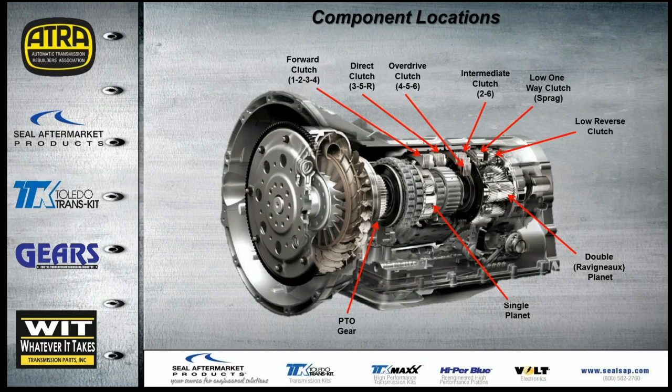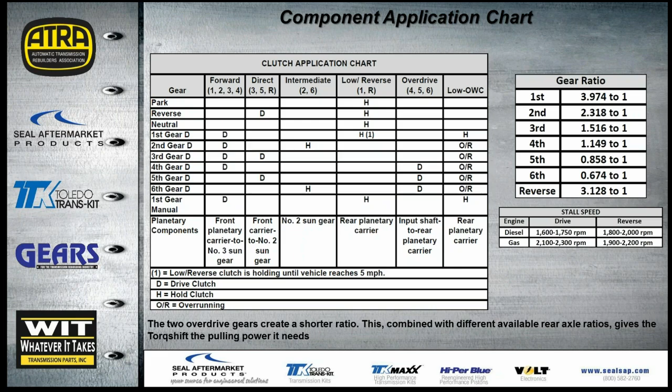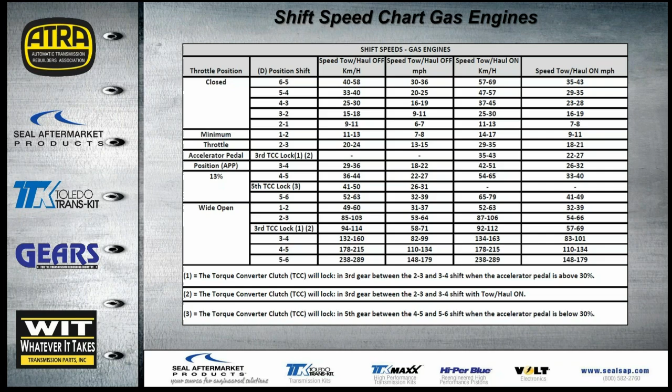And then you can see number 3 at the bottom, lockup will come on in 5th gear, also between 4th and 5th and 5th and 6th. Again, the accelerator pedal has to be below 30%. So this is considered normal operation.

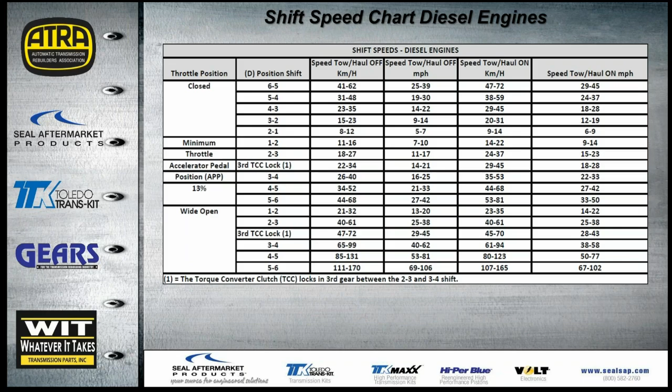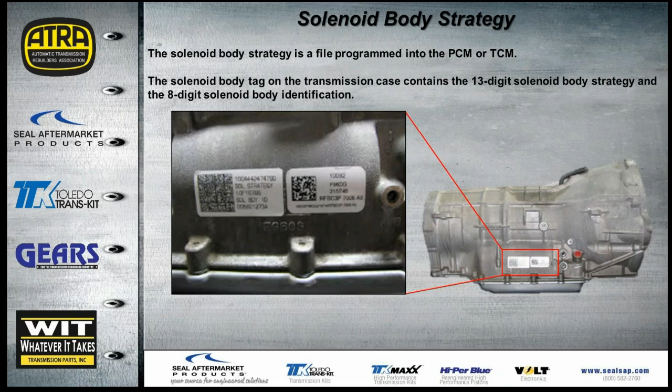Anytime a new valve body is installed or a new solenoid body strategy file is downloaded into the PCM or TCM, you're going to need a capable scan tool. A replacement solenoid body tag is supplied when you buy the new solenoid body. This contains the 13-digit solenoid body strategy and the 8-digit solenoid body identification. As you can see here, the new tag would be placed over the original one with the solenoid body tag.

You just place that over that one there. Again, if we're not changing anything, we do want to take a picture of this tag also and keep that on file.

Now, if the solenoid body strategy printed on the tag or the solenoid does not match the solenoid body tag on the side of the case, a new valve body must be installed and the solenoid body strategy must be downloaded into the PCM or TCM.

You could have problems of harsh shifts, erratic shifts, harsh engagements. This could be due to the fact that the solenoid body strategy is not programmed into that PCM. This happens quite a bit when guys swap out valve bodies with used ones or reman ones and don't update the software for it. This is going to be something that's coming over the tech line quite often.

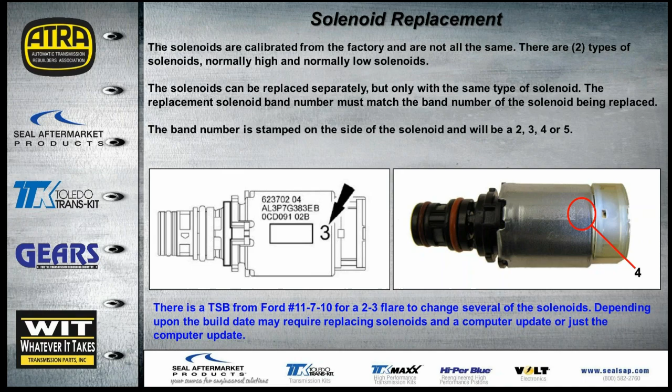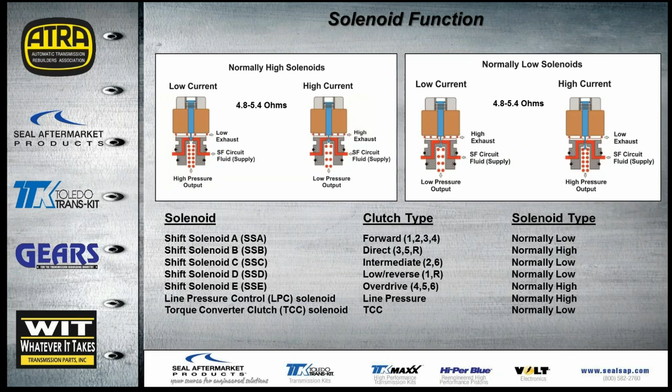Now, we recommend marking the casting on the valve body and marking the solenoids so that when they are removed, they will be placed back into the same location that they came from. And now we're identifying all the solenoids here for you as far as which ones are for each clutch, also whether they're normally opened or normally closed.

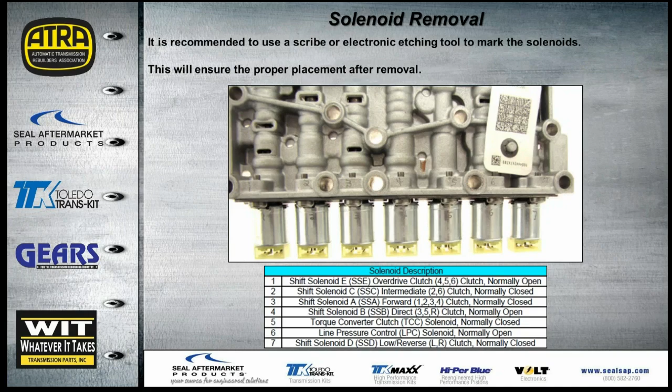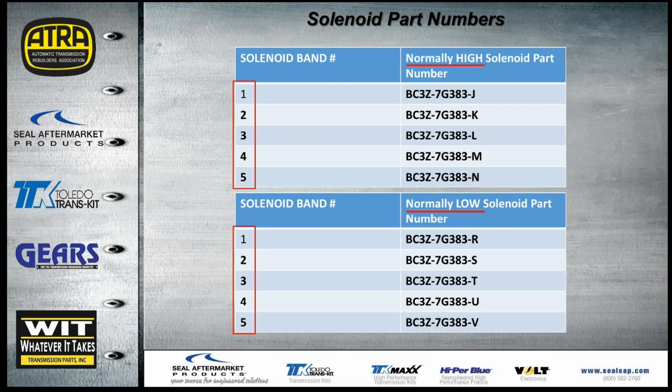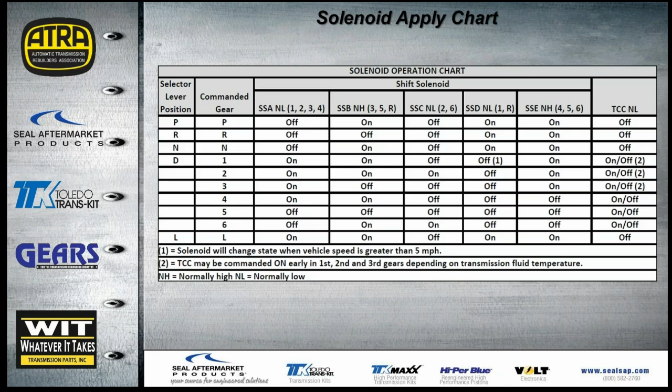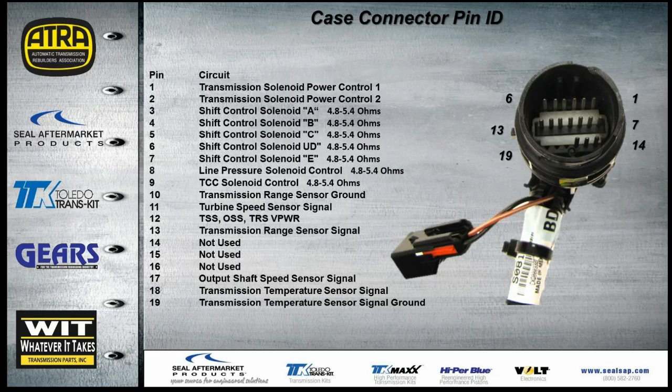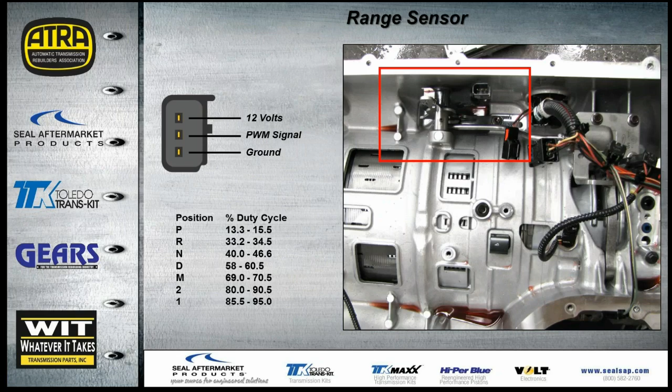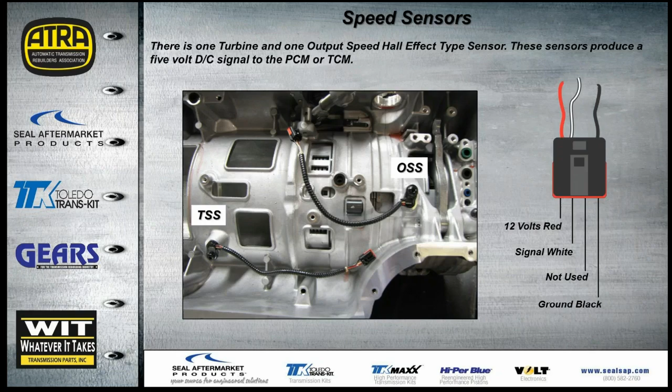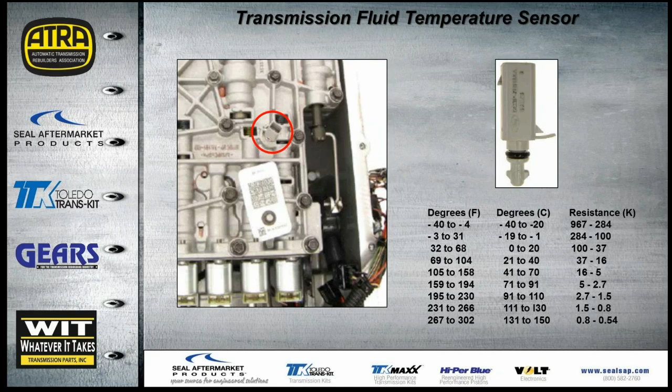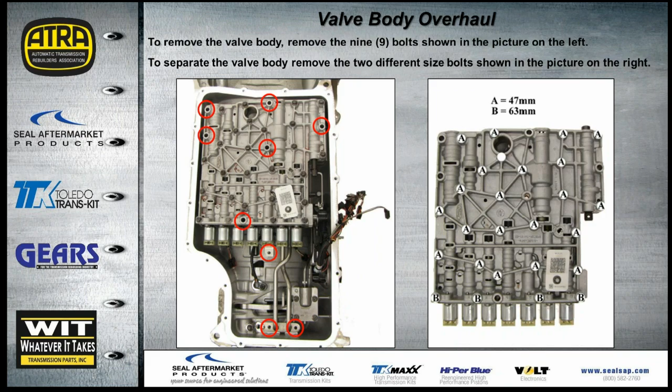Now once the valve body is off, the bolts that we're showing you on the right, there's 2 different lengths. The bolts marked B are 63 millimeters, the A's are 47. These are the bolts that will have to be removed to split the valve body. And now you have the locations for where the 4 longer bolts go.

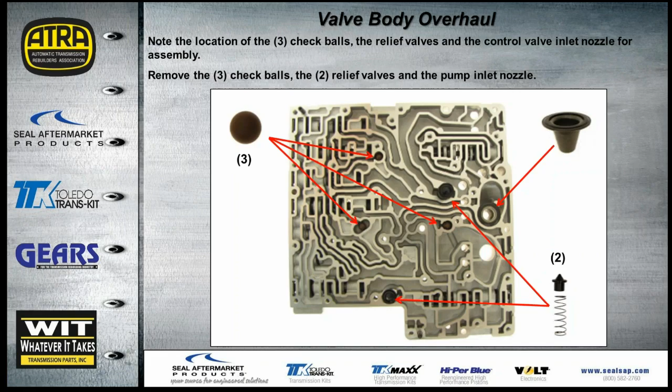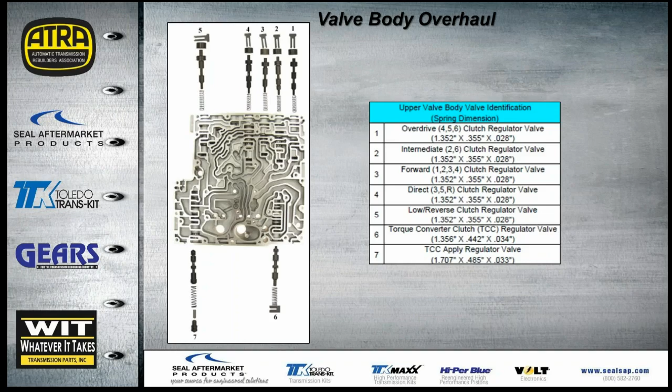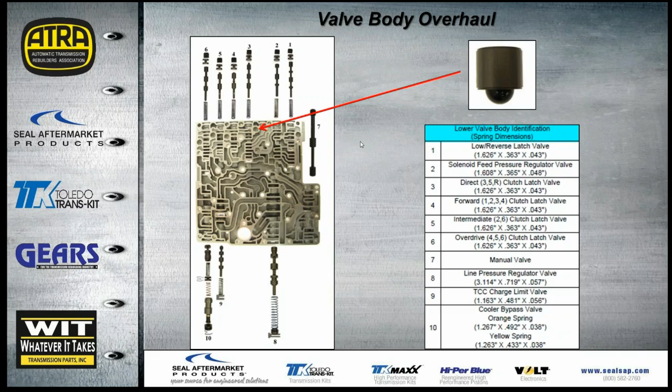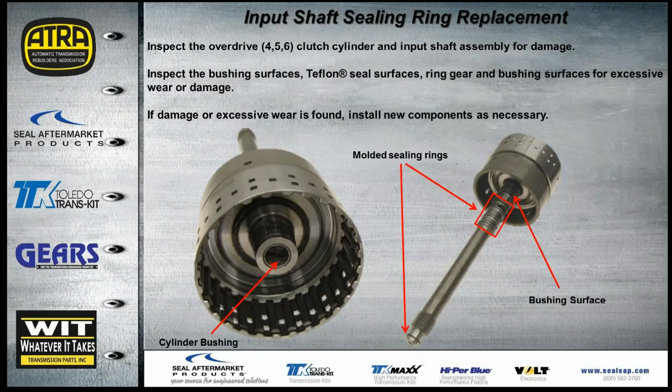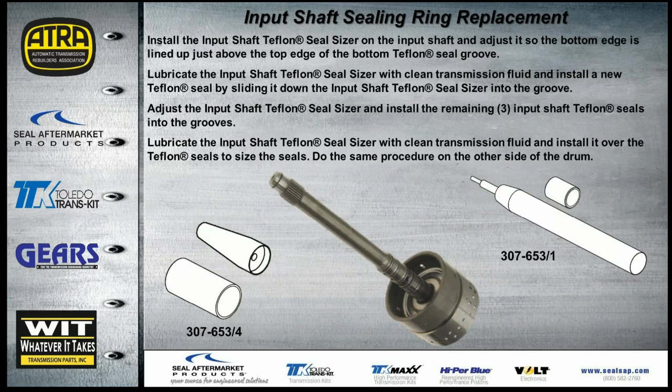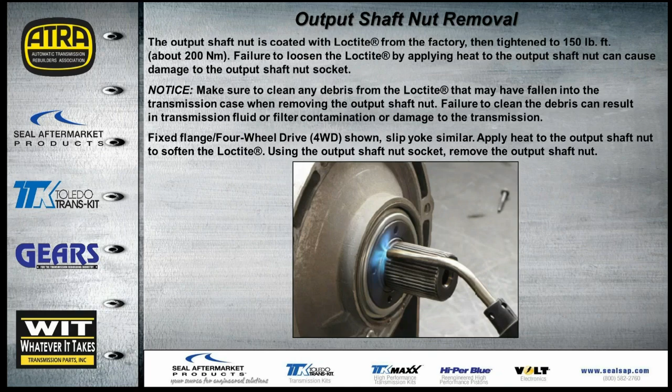Now the output shaft nut is very similar to what we've dealt with on the 6R140. This particular nut is very tough to get off - they use some super strong Loctite at the factory. And I want to tell you, you really need to heat this up before you try to take it off. I've seen guys go through several tools, keep stripping the tabs off the end, trying to do this without heating it up first.

Now this is a pretty hefty unit. It weighs about 350 pounds or 160 kilos, and that's with the torque converter installed. It's slightly heavier than an LCT 1000, about 20 pounds or 10 kilos difference.

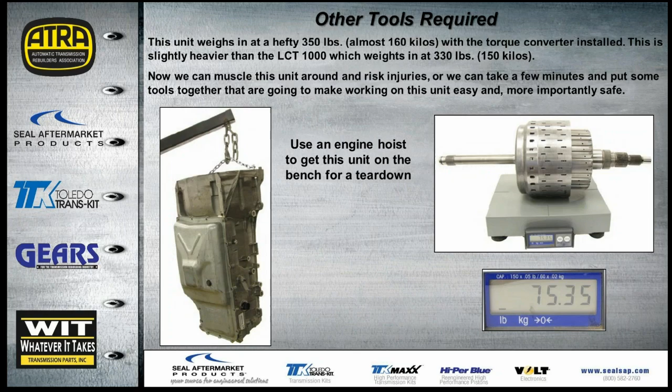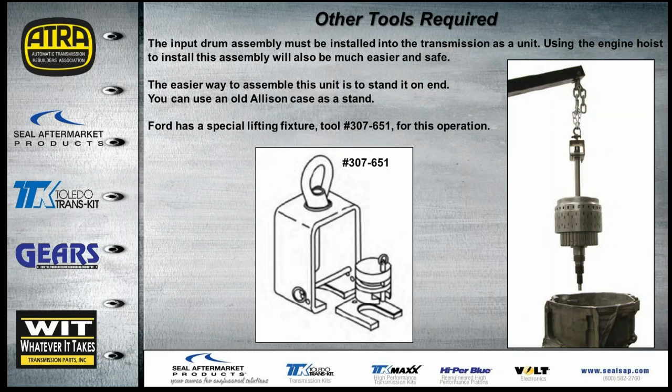You can also use an old Allison case as a stand if you want to stand it up on the case rather than put it on the bench. Keeps it much lower and easier to work with.

Now this is a duplicate tool that was made pretty quick and pretty easy to do. Just take some square tubing, put an eye bolt onto it, a couple of pieces of flat steel. Just duplicate what you see here, and then you can bolt the two steel plates together and make your own tool to go ahead and install that drum, that whole drum assembly.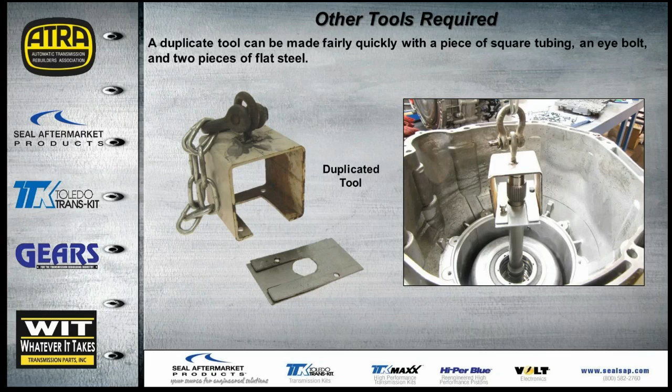This is the Ford patented rocker one-way clutch, or diode. I'm not a big fan of diodes, but it seems like more and more transmissions are going this way. Now this diode is actually integrated into the carrier. This is to help improve the 1-2 shift quality throughout the gear set.

Remember, like I said before, we're going to release the low reverse clutch on takeoff, so this is the diode that's going to hold before it makes that shift in a second. So now we don't have to worry about releasing one clutch to bring on another, which could affect shift quality either by flares or bind-ups. By just having this sprag in there, we can release the clutch long before the second clutch comes on. Then when that clutch applies, the sprag will just rotate and freewheel the other way.

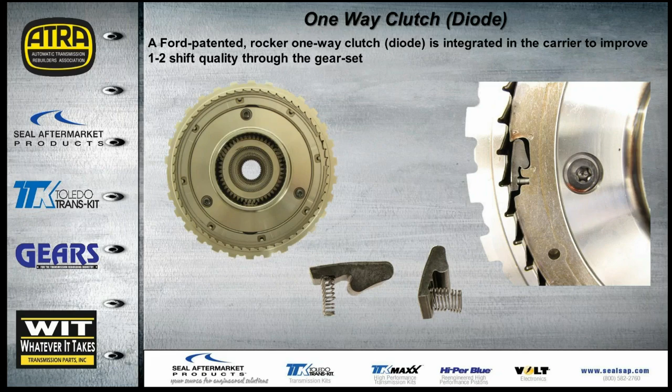Now this is the torque converter. As you can see here on the right, this thing by itself weighs about 66 pounds. It has an internal spline for a PTO. It also has a splined hub for the pump itself. So whenever the engine is running, the PTO gear inside will be turning.

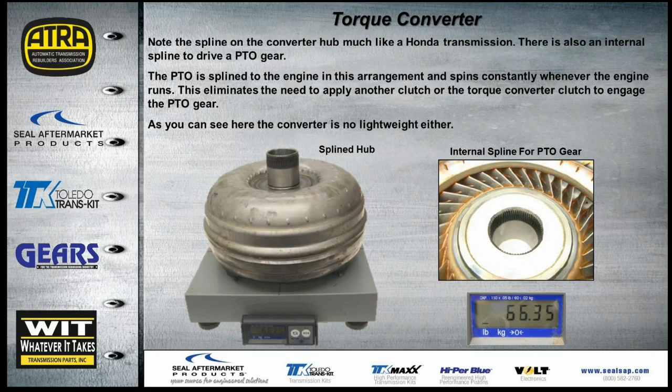They wanted to do this so they wouldn't have to use any clutch or torque converter clutch to engage the PTO. If you had a PTO gear on this, you would see the drawing that we have for you on the right, and the gear would actually protrude right out there in between that space that you see the arrow pointing.

Another thing I noticed about this transmission, I just want to make a note of: the front sun gear is actually splined to the stator support, so it's held all the time, very similar to what we've seen in ZFs with the Lepelletier gear train.

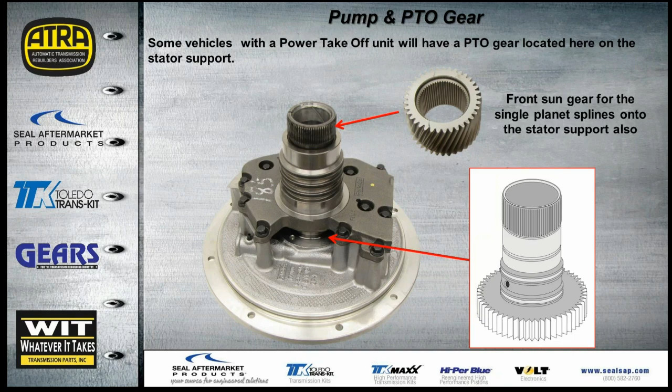Two case seals I want to point out here. There's one right there in the center of the case. Remember earlier I was talking about that one single bolt that has to be removed. Well, underneath that tube right there, there is a seal that goes to the case. I want to make sure that gets replaced.

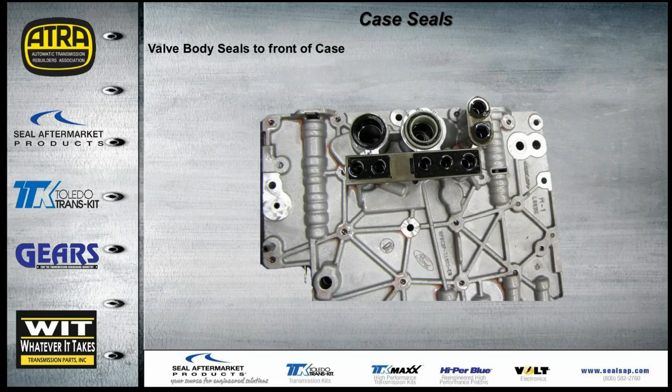Also in the back of the case where the tubes mount up, there's three more tubes there that are color coded: one dark blue, a black, and a green one. Also up front of the case, where the valve body will seal down to the case itself, you can see the pump inlet and outlet right there. The sleeves need to be checked, and these seals need to be replaced during every rebuild.

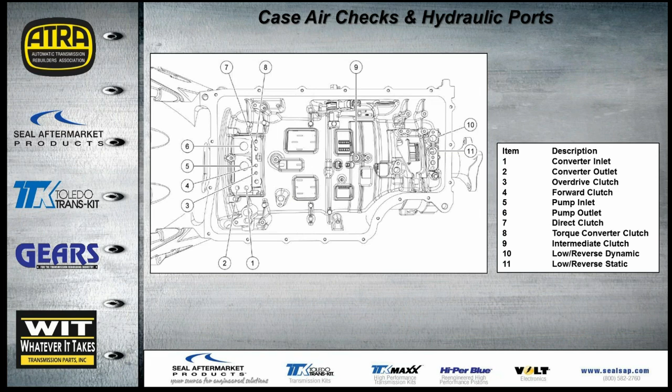Once it's all assembled, we can go through underneath the case here with the valve body off, and we can air check all our clutches, including the torque converter. We have all the air checks identified there for you.

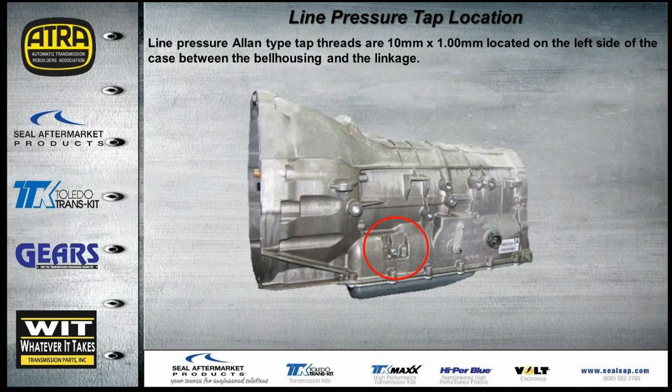There's a line pressure tap on the left side of the transmission toward the front. It's an Allen head type, and the threads are 10 millimeter by 1.0 millimeter. It's located right there between the bell housing and the linkage.

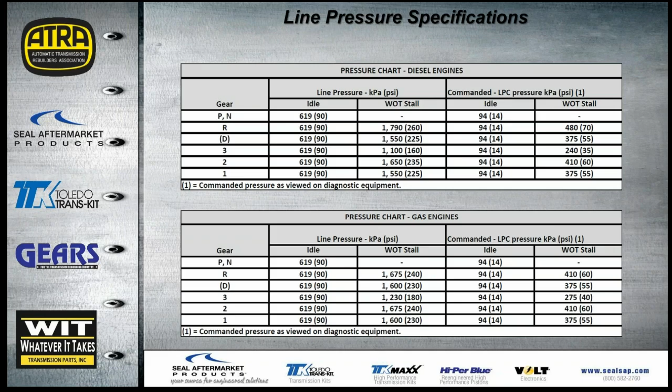This transmission takes Mercon LV. I would suggest using it. There's a local shop here that does quite a few of these. They were using a multi-use, good name brand synthetic, and it seemed to be working fine, but one day they had one that gave them a TCC chatter they just couldn't get rid of. Since they had used the other oil consistently without problems, they assumed they had a problem with the trans. They took the trans back out, found nothing wrong with it, had the converter recut and rechecked, still couldn't find anything. Once everything went back in the vehicle, it still had a converter chatter. They went to use the Mercon LV, and that took care of the problem.

Now, fluid level check - there's 2 different types of dipsticks. The measurements are pretty much the same. You have the fluid capacities for gas and diesel there. So there's an early and a late dipstick, and that's what they look like.

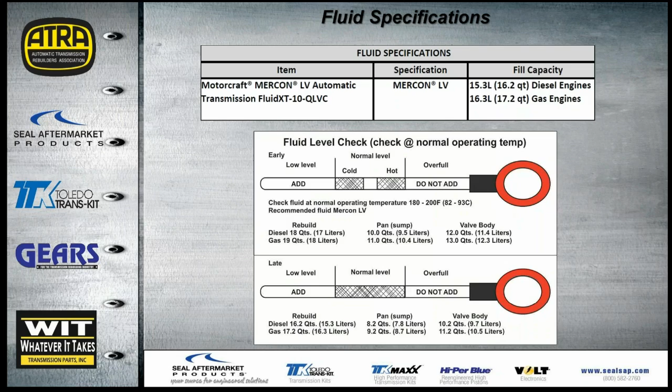We also give you the clutch quantities for each plate. The diesel obviously takes more than the gas. As you can see in the first one, the forward clutch, it takes 5 frictions and 5 steels, and the gas engines will only take 3 clutches and 3 steels. Obviously, if we wanted to make a gas engine more durable, we could use the same frictions from a diesel to beef up those clutch packs.

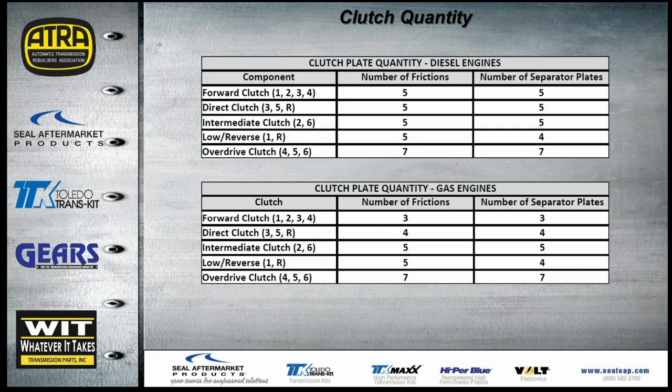We also gave you the clutch clearances here in these charts. You have them in millimeters and inches, and obviously there is a difference between the diesel and gas engines, except for the low reverse clutch. The low reverse clutch we're showing you here at the bottom is the same for both. You'll also notice that the specification is measured as the height of the low reverse clutch, not the actual clearance.

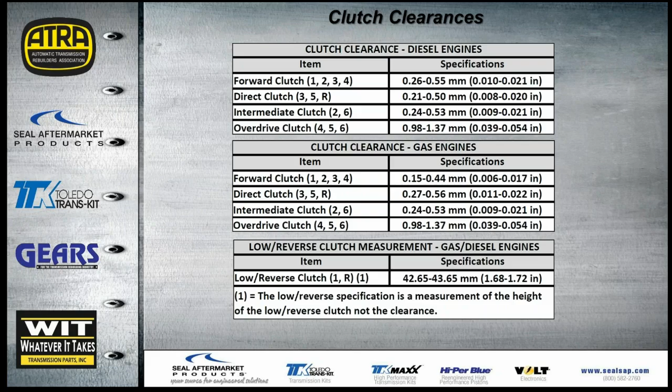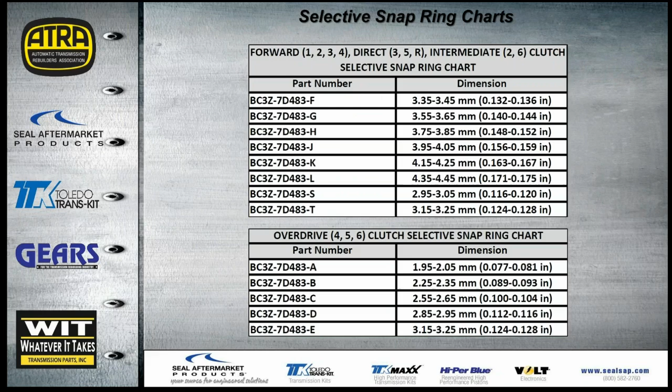And you have the chart with the part numbers for all the selective snap rings that you'll be needing for the forward intermediate clutch, forward direct and intermediate at the top, and then we have the overdrive clutch snap ring chart there for you at the bottom.

When it comes to checking unit end plays, if you have to make any adjustments, you can see here that you have the part numbers for the selective shims for the front, as well as the selective shims for the rear of the transmission. You also have the total end play clearance right there at the bottom of each chart.

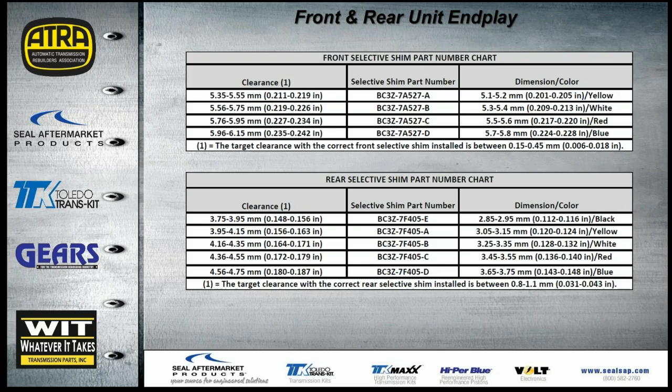And then we have the specifications for all the torque specs. This includes everything on the transmission from the manual shaft all the way through to the valve body. We have it in Newton meters, and we have the foot-pound and inch-pound displayed through there also.

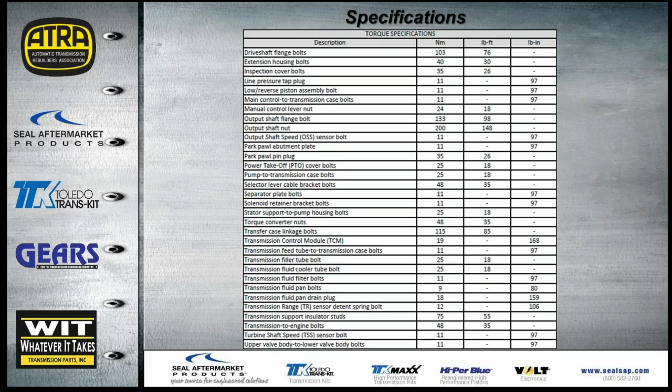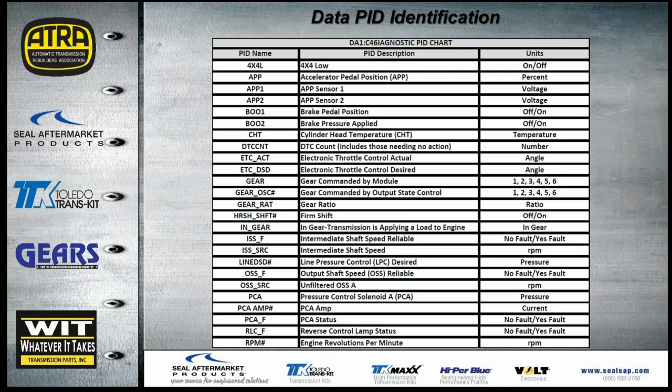Data PID identification - a lot of times when I'm working on a new vehicle I haven't dealt with before, sometimes I'll be scrolling through the different data PIDs and I'll read something that just doesn't make any sense. So it's nice to have a chart like this that actually explains what the data PID means, the description of it, and also the units that you'll be reading from it.

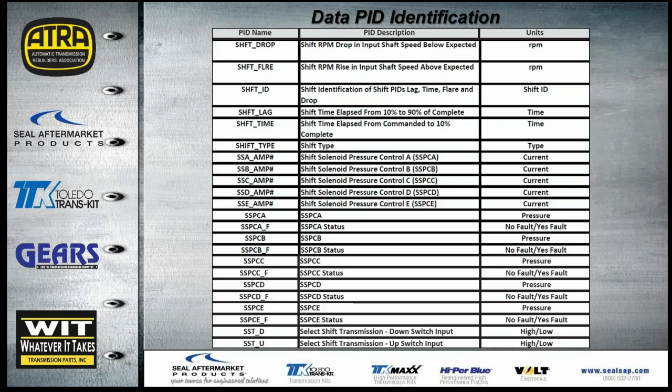We have several more here. These are for the actual shift solenoids, so you'll be able to read the current that's being sent to the solenoid, as well as what the pressure should be reading. We can actually check that with the scan tool and a pressure gauge.